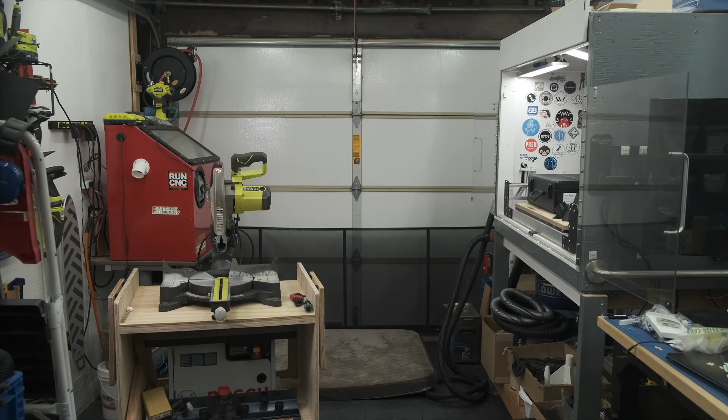I suffer from a mental affliction called being an engineer. It means I go through life looking at everyday objects, breaking them down in my head, wondering how different parts were made, and imagining how they could be improved. It could be anything from cheap plastic knickknacks to consumer electronics to storefront signage. One of the items in my shop that has been a long-standing subject of this silent, sometimes judgmental scrutiny is this, my Ryobi compound miter saw.

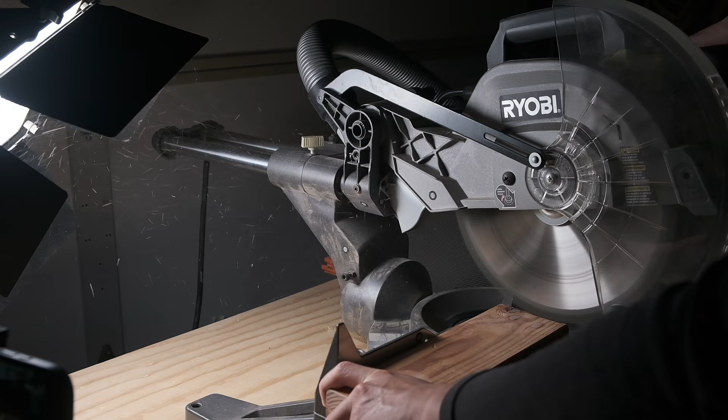I bought this thing years ago when I was building out my shop on a budget, and while it does the job I need it to, I've always hated one thing about it. This dust collection system, because to be quite honest, it does absolutely nothing. It's a flimsy funnel that's woefully inadequate for the task it's supposed to do, and it lets dust get everywhere in my shop. That's partly why I made it a priority to install an air filter in my garage.

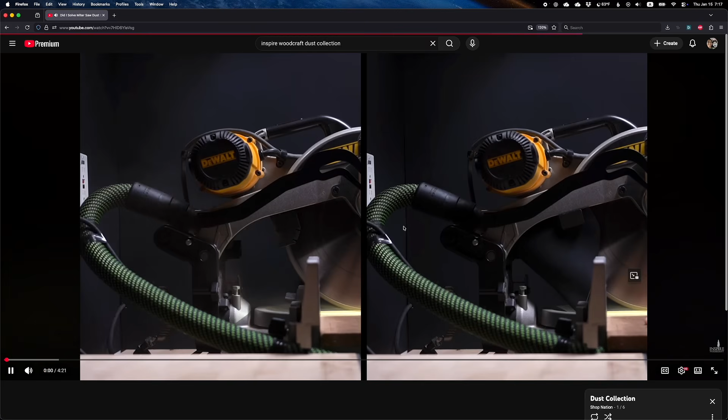But I know this deficiency can be fixed because improved dust catchers can be had for other miter saws, even if only because of third-party modifications. YouTube channels like Shop Nation and Inspire Woodcraft come to mind. And the idea that I could one day fix my own miter saw has actually been stuck in my head for years now. There's just been one major obstacle.

The design constraints for these two-part injection-molded vacuum hose adapter and catcher funnel that Ryobi made revolve around some seriously funky geometry. And while I could try and measure and model and design and iterate against a questionably accurate 3D reconstruction, I've recently gotten a hold of what I believe is a much better option.

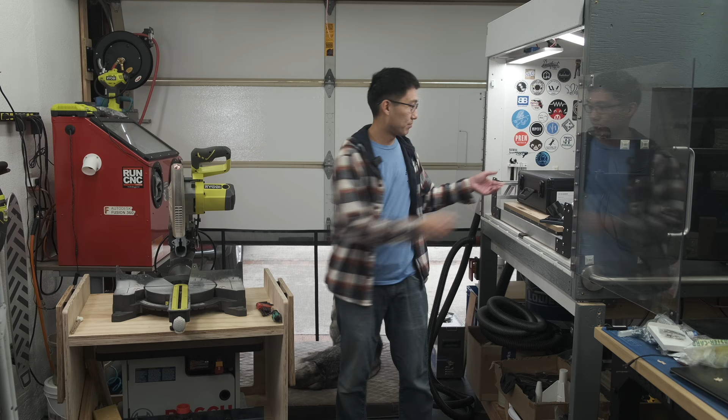This is the MetroY Pro 3D scanner, one of Revopoint's latest models, which they were kind enough to provide for me to play with. With this device, if the marketing material is to be believed, I should be able to create a digital clone of my miter saw way faster than I could by painstakingly reverse engineering the thing with calipers. And then from that 3D model, I ought to be able to design an upgraded dust collection apparatus.

Now, I've never used a 3D scanner before, so although this is something I'm genuinely excited to try out, please keep in mind that I am not an expert. I'll do my best to provide some basic information about the scanner, how it works, and my experience using it as accurately and honestly as I can.

But if after this video you think 3D scanning is something you'd be interested in learning more about, I would highly suggest seeking out a couple other videos about this subject from more experienced people. There's some really solid content out there, both about 3D scanning in general and using specific scanners like the MetroY Pro. I found those quite useful in my own education. With that disclaimer out of the way, let's talk game plan.

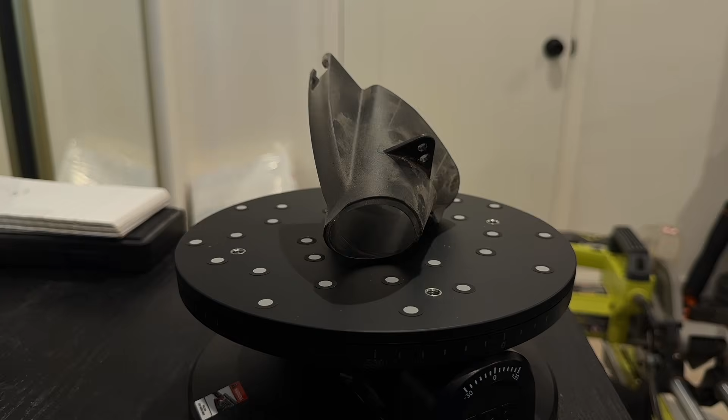First, I'll need to scan my miter saw, and probably the dust collection parts too, but separately. Then I'll need to process the point cloud data from my scans into a mesh model that I can import into Fusion 360. In Fusion, I can align that mesh to my coordinate system and start 3D modeling against it. And then with some iteration and 3D printing, I should end up with an improved dust funnel for my miter saw.

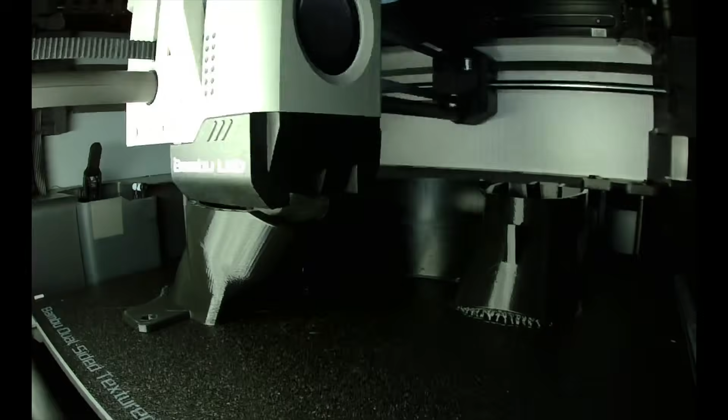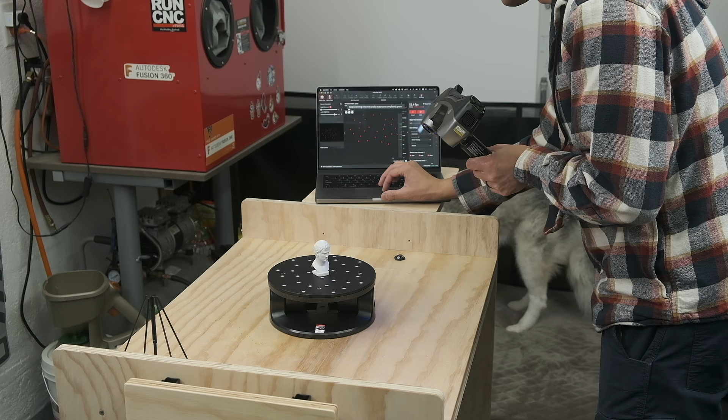Conceptually, that all seems very easy, but as a 3D scanning noob starting from zero, there's a few more steps that are implied and probably shouldn't be discounted. First, I need to understand what exactly this device is that I agreed to try out, and also figure out how to use it and the included scanning software that I've never touched before. And for that, I should probably do some test scans on simpler geometry to get the hang of things. Gotta learn to walk before I run, right? So let's dive in, starting with the hardware.

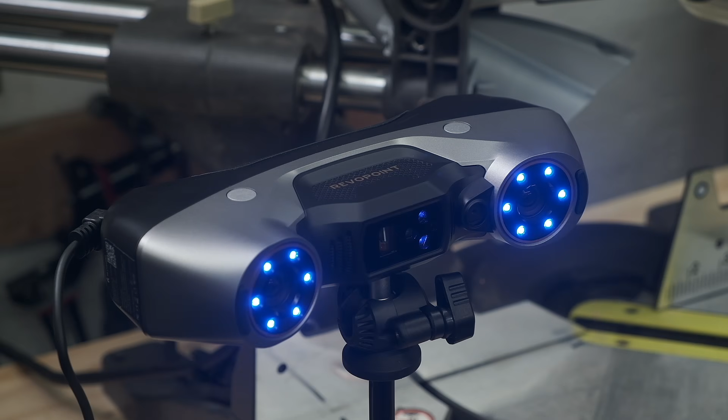This is the MetroY Pro, the latest addition to Revopoint's Metro family of scanners. The Metro series kind of straddles the line between prosumer and professional use cases, and is good for what Revopoint describes as small to medium-sized projects, basically anything up to about 1 meter cubed. The primary method of scanning revolves around using a blue laser source to project patterns on a subject, and using 2 offset image sensors to triangulate where those patterns fall on a surface.

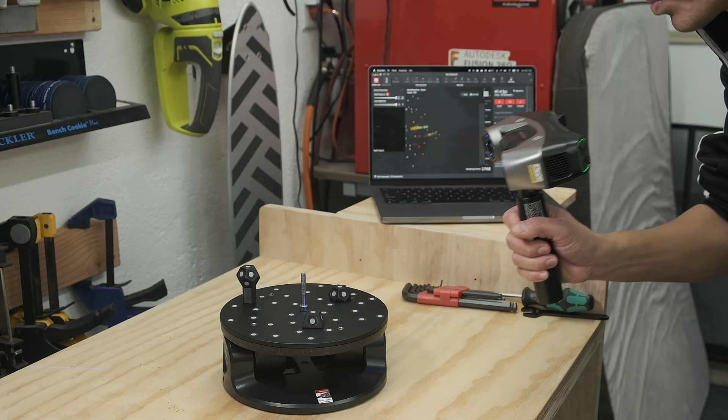The capture resolution is supposedly good enough to register some pretty tiny details, think thread profiles, mold parting lines, or the complicated fillets that injection molding designers love to hide in dark corners of a part. And one of the big headline features of the MetroY line that Revopoint says sets this apart from its predecessor, the Metro X, is wireless scanning.

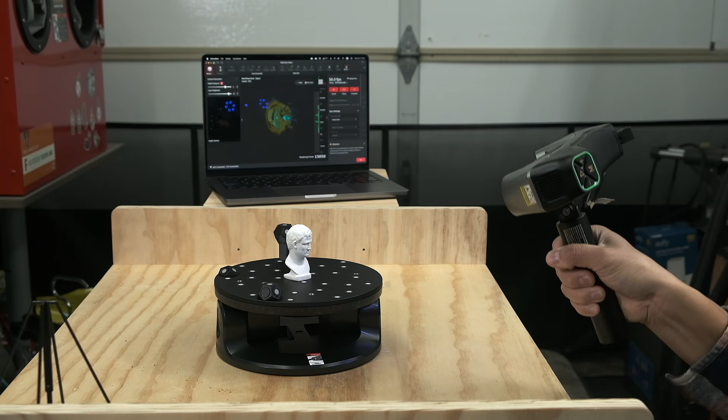You plug this thing into a power bank, connect your computer to the scanner's Wi-Fi network, and start scanning, which can be handy since you'll often need to point the scanner at your subject from multiple, occasionally awkward angles. Being untethered can be a nice plus.

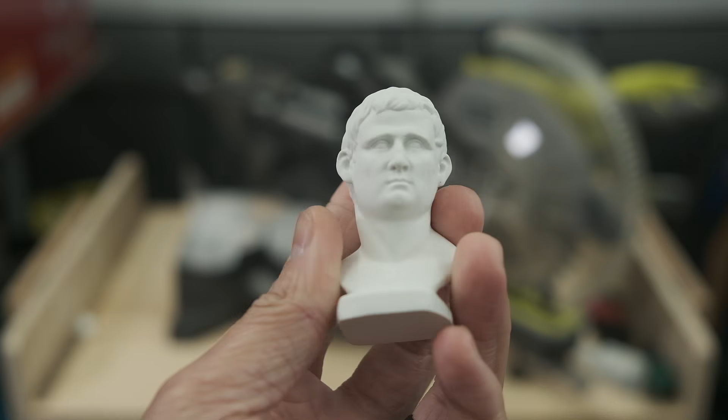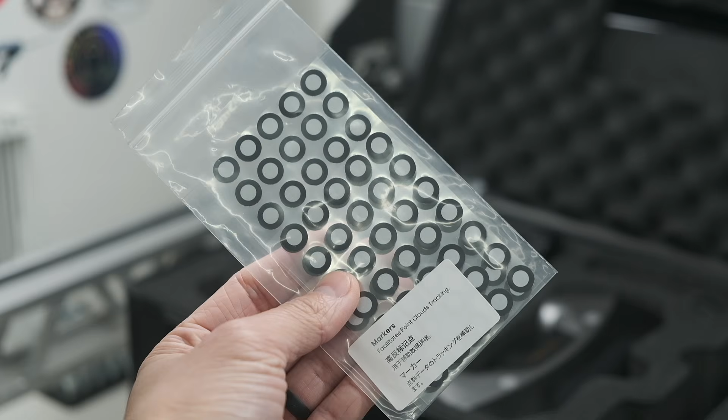The astute among you might realize that the thing I'm building up to scan is the exact opposite, covered in shiny metal and dark painted surfaces, but don't worry about that right now, that's a problem for later. The Metro line of scanners requires the use of retroreflective dots to serve as reference points. If you're familiar with virtual reality or AR headsets, this is very much like inside-out tracking.

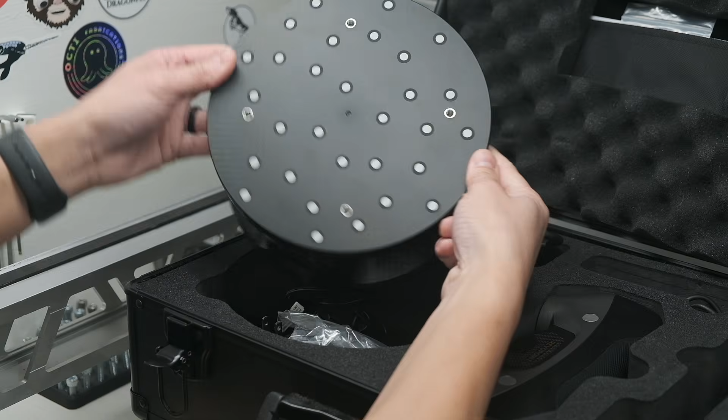A camera in the device looking out finds features in its environment and uses those features to geolocate itself. For inside-out tracking though, I need 4 markers to be visible at any given time. And with an object as small as this mini bust, I can use the included turntable accessory to provide the tracking markers needed as long as the angle I'm scanning at isn't too shallow.

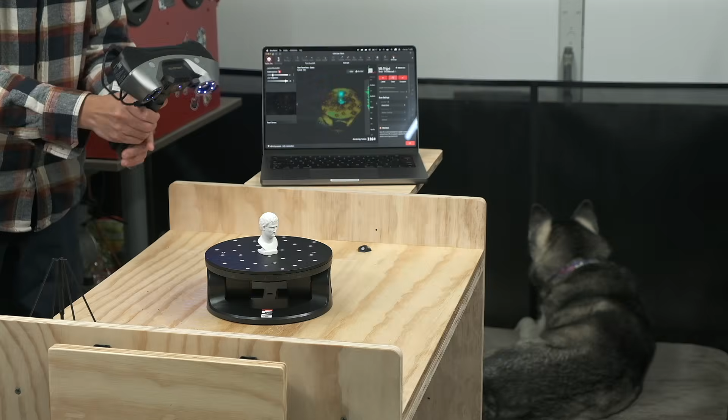Now, I didn't really prepare much for this experience other than watching a couple of YouTube videos. I just wanted to start blasting with lasers. And what I quickly learned is that while the scanning process is pretty simple, the more meticulous you are, the better your results. You need to sweep the light pattern the scanner emits over the surface multiple times from different directions while varying the angle constantly.

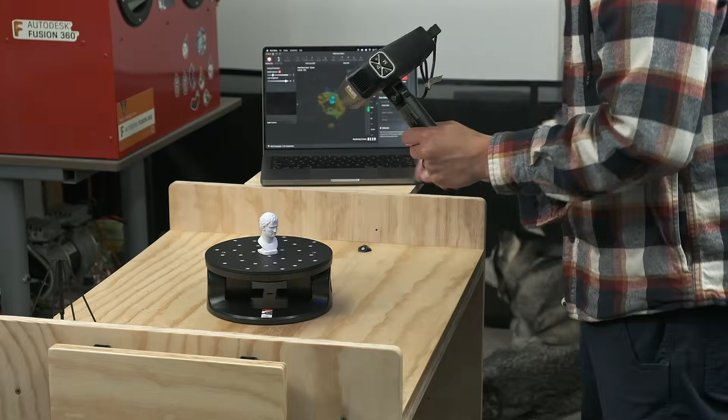While you're doing this, the MetroY Pro is continuously snapping stereo images of the subject and sending it to a computer for processing. That doesn't happen on device. The better your computer hardware, the more images per second you can process.

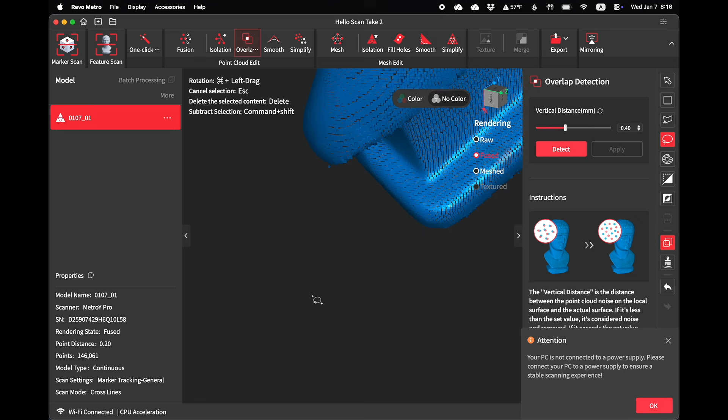After a couple minutes of scanning, I was able to try out the post-processing pipeline in Revo Metro, cleaning up the point cloud and then meshing the data. The software has a pretty linear flow, and I got all the details I cared about from a single scan. No need to fuse multiple scans to create a complete model. So that means I'm ready to scan the miter saw, right?

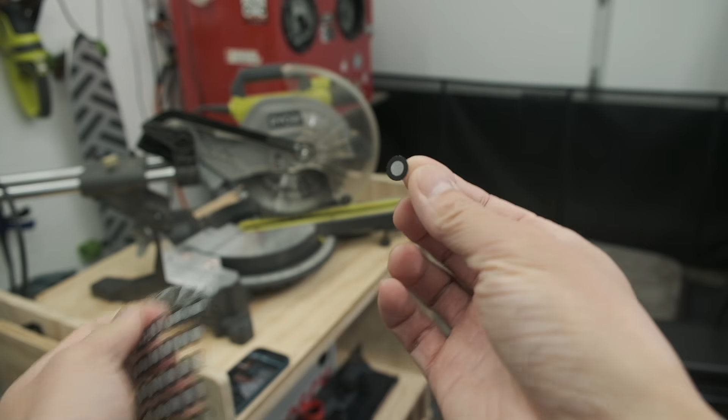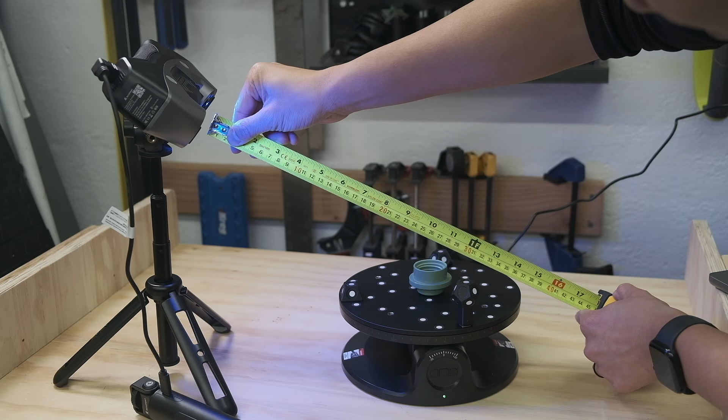Almost. Scanning something bigger is going to require me to place tracking dots all over the place, because if you remember from earlier, you need at least 4 in view at any given time. When you factor in the MetroY Pro's field of view of just under 50 by 40 degrees, which looks like this, and consider that the optimal scanning range is between 200 to 400 millimeters, or roughly 8 to 16 inches, it works out that you basically need a tracking marker every 4 to 6 inches, and that assumes every tracking marker has a clear line of sight to the scanner at all times.

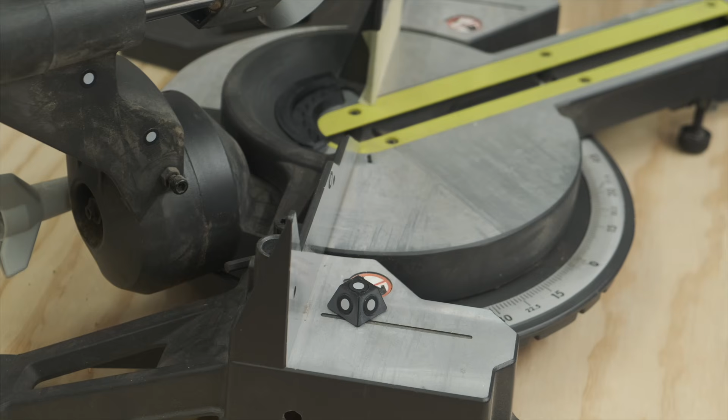If the geometry you're scanning has a lot of protrusions or irregularities, or you need to scan from many different angles, you're going to need even more to provide consistent coverage. That means potentially dozens of dots per project depending on the geometry's size and complexity.

Now, Revopoint included more than enough markers to get me through this project, but I don't like the idea of these being single use. One workaround is to use blocks with markers on them as temporary datums, and Revopoint does have marker blocks you can buy for this purpose, but I was in a bit of a time crunch and I didn't want to wait for a set.

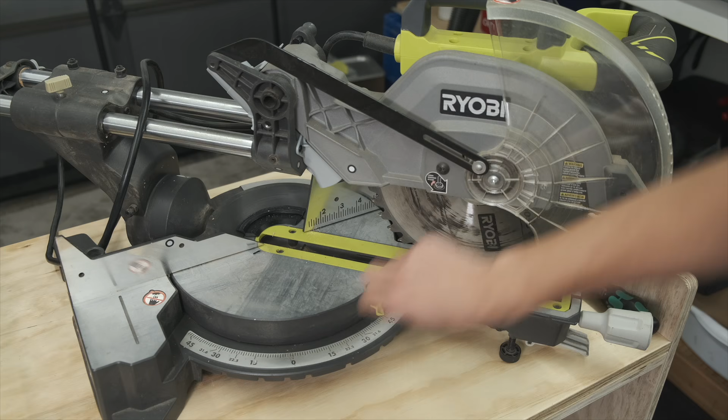Thanks to the power of the internet, specifically the 3D printing community, I was able to make my own reusable magnetic markers in a matter of hours. The key when using these things is that they need to be really stable, otherwise you'll throw off the whole scan. That was a lesson I learned the hard way. I placed these marker blocks all over my miter saw, including sticking some to the saw blade.

Now, tracking markers are only half the story. We need to talk about the imaging process too. Shiny objects scatter light, dark objects absorb light. Neither of these things are friendly to optical scanning tools that project a pattern of light onto a surface and interpret the reflected return. My miter saw is not a subject that lends itself well to 3D scanning, at least not without modification.

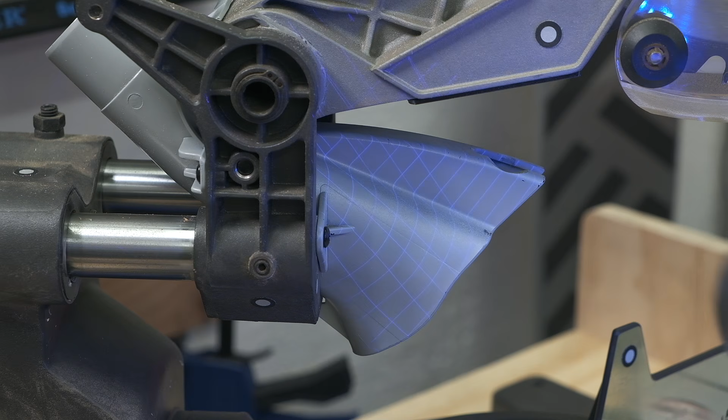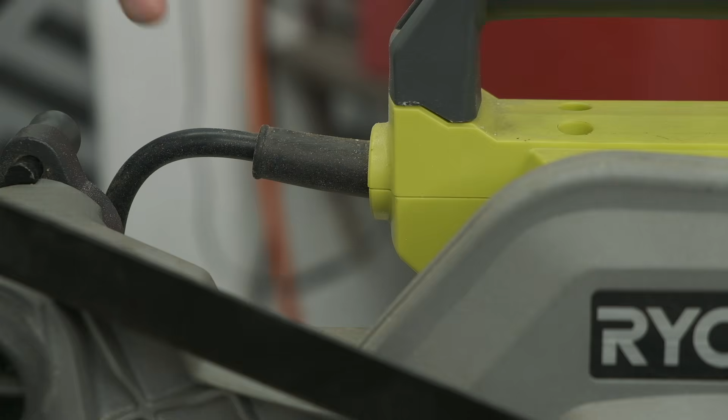There are products out there you can spray on an object to make surfaces easier for a scanner to read. These will either sublimate in a few hours or require mechanical cleaning to remove. You can also use a DIY mixture of something like alcohol and cornstarch or talc powder in a spray bottle, though they don't always adhere very well to all surfaces. Instead of using one of those options though, I decided to see if I could get by with an all-natural coating of grime and sawdust.

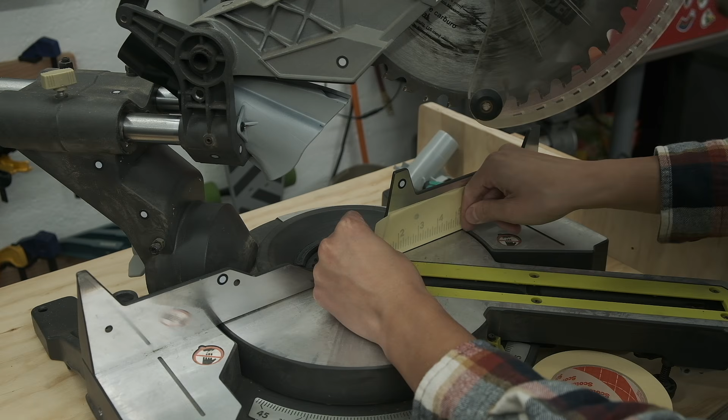There were a few places though where I wanted to make extra sure that the scanner got a solid laser return, so I used some low-tech surface modifiers like tape and paper. My saw's fence was one such area, since that's a set of surfaces I know I'm going to want to reference in Fusion 360. And for the table, since it's flat, I thought I could just place a sheet of paper on the saw as a reference.

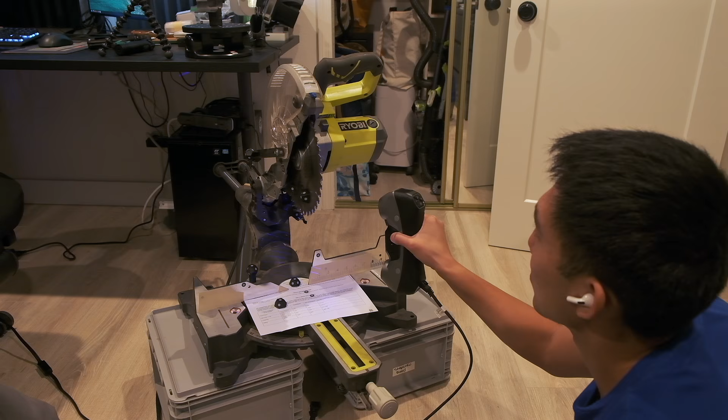That ended up working okay, but there was one time I accidentally bumped the paper when I was trying to scan around the saw blade, which ended up moving several tracker markers. The main castings on these Ryobi saws are aluminum, so the magnets in my marker blocks were useless. Because of that bump, I had to terminate the scan early. You can see that once I realized what had happened, I made sure to keep the scanner pointed up to avoid contaminating the point cloud data until I paused and stopped the session.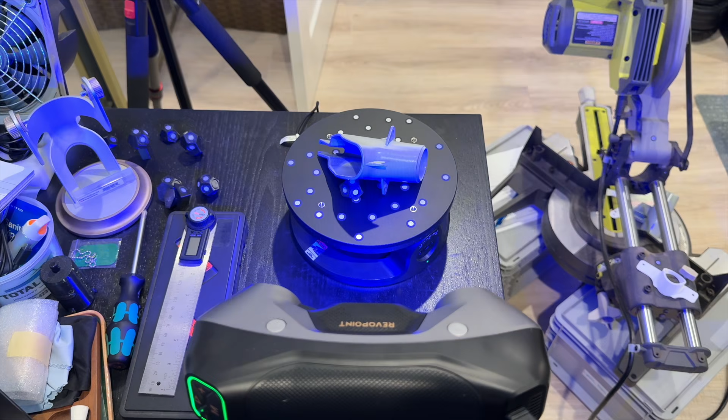And as an extra point of reference for my design, I also scanned the original injection molded dust collection parts that came with my saw. These pieces are made of black plastic, so scanning them posed some challenges, but since I had no intention of using them again, I figured there would be no harm in spray painting them to a lighter color. These parts, when set on the turntable, ended up scanning into my computer brilliantly without any trouble at all.

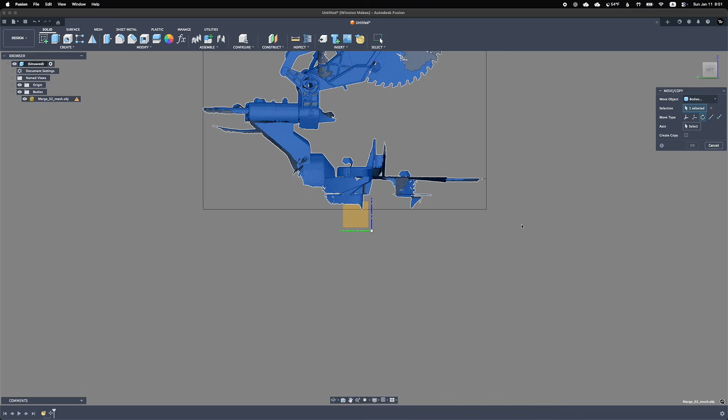I brought my completed mesh model into Fusion and aligned it to the global coordinate system as best as I could. I basically just used the edges of my monitor as a reference and lined up the perpendicular edges of the saw against it. After getting my model situated, the first thing I did was draw up a simple test plate to see if it would interface with the real saw.

One of the nice things about trying to reverse engineer a metric product is that even though the mesh model is imperfect, you can usually assume that an engineer designed it using nice round numbers, or at least to a clean decimal point. That assumption doesn't hold up as well when things are designed in inches.

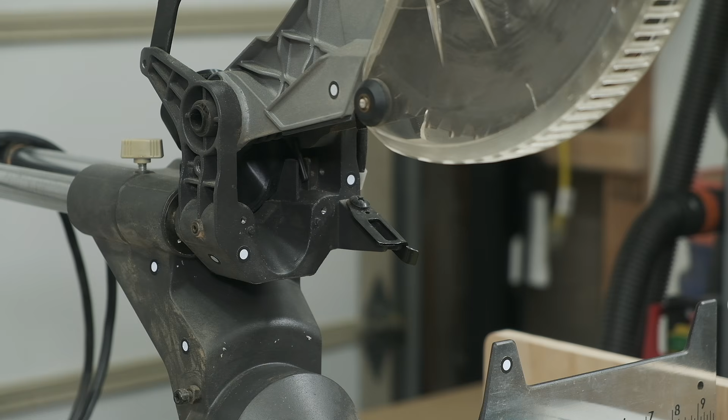So although my handheld scan of certain dark areas wasn't able to resolve features like M4 threaded holes, that would obviously be asking too much, I can easily make out where the mounting holes and locating bosses for the dust chute are and guesstimate their coordinates with near perfect accuracy. And as evidence of that, my little test piece fit perfectly.

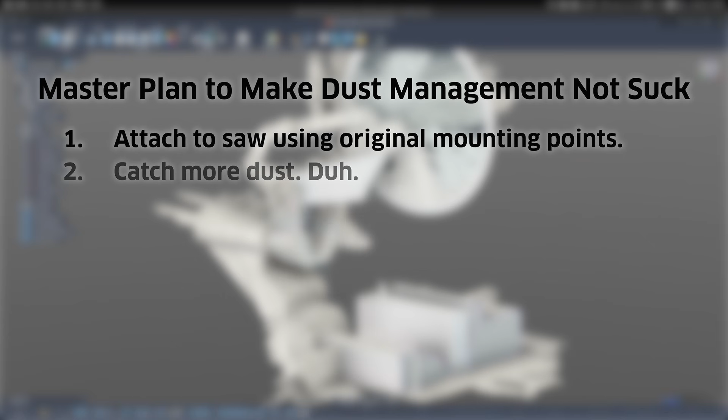With the scan and accuracy of my model verified, I started working on an improved dust funnel. These are the requirements and constraints I had in mind when doing this. 1. The new design must fit the miter saw the same way as the original. 2. It must catch more dust than the original. If it doesn't do this, that's an obvious and instant fail. 3. It needs to promote better airflow and hook up to a vacuum hose with less flow restriction.

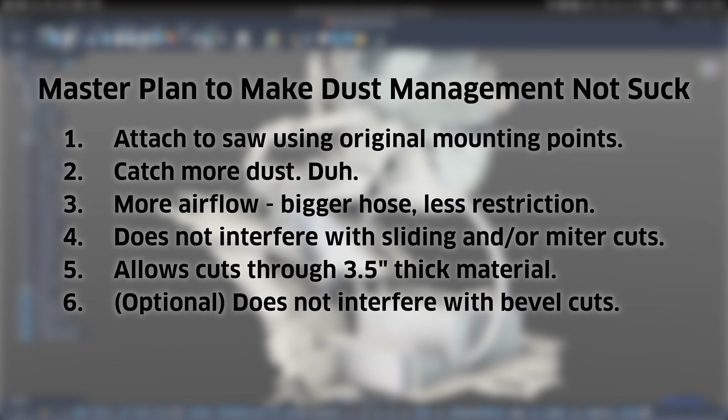4. It can't interfere with sliding crosscuts or miter cuts. 5. It shouldn't prevent cuts through materials up to 3.5 inches thick. That dimension was chosen because 2x4s are the most common thing I'm cutting on this saw. 6. Optionally, we should also be able to perform bevel cuts with minimal disruption, but admittedly this one is the hardest constraint to respect because the clearances get so tight, so we'll just do what we can.

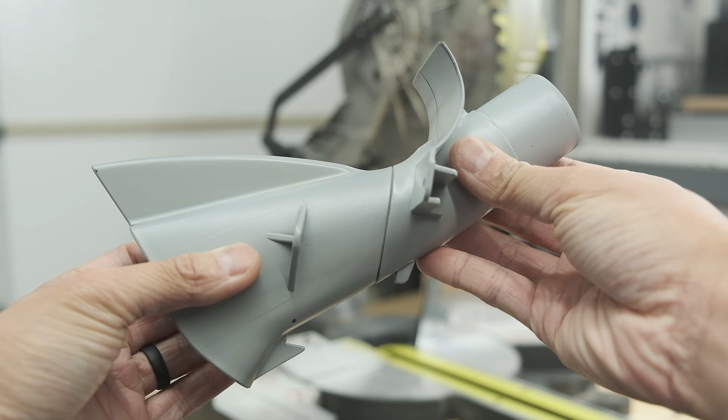My working idea was that I could remake these parts to have a larger cross-section for both better chip collection and higher airflow. Basically, reimagining these parts without the constraints of injection molding and trying to use every last cubic centimeter available within the saw's frame.

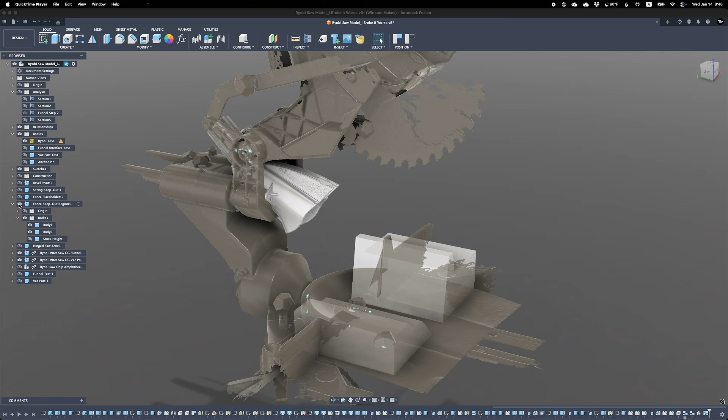Early on in the modeling process, I made some helper geometry to aid my design. Stuff like virtual pivot points for joints, and keep-out regions like for where the torsion spring for the saw arm lives, or the fence, or expected stock that I would cut. Now, you'll notice that the keep-out region for the fence here doesn't match the original scanned fence, and that's because I took the shape of the original fence and rotated it plus or minus 45 degrees, then projected that profile onto a flat plane perpendicular to the saw blade. This way, I'll know how close the fence gets to the blade and the dust collection bits during different miter cuts.

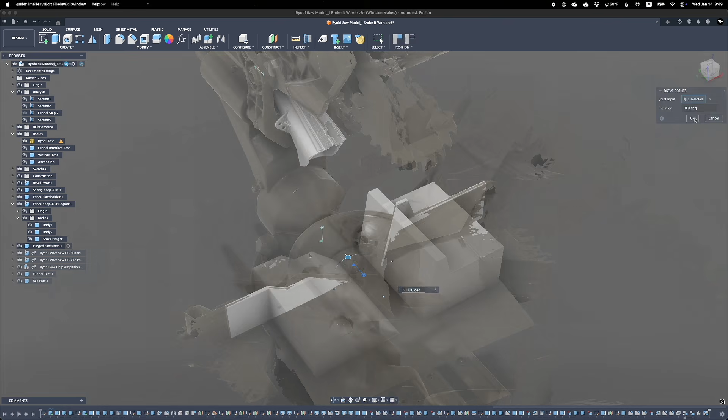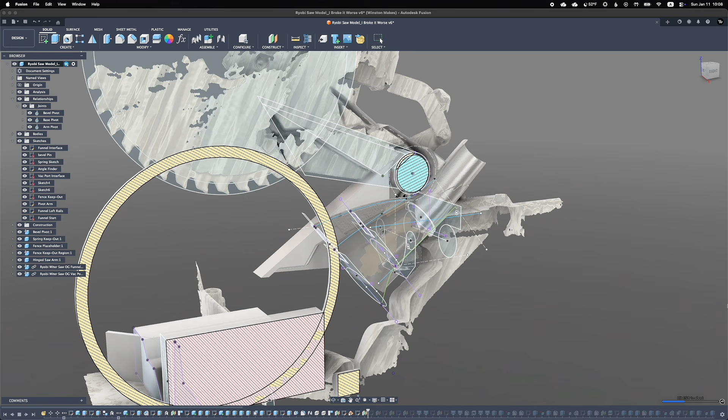Also, I made a crude model of the saw's pivoting arm since I can't actually manipulate the mesh model. This gives me a bare minimum working model of the saw that I need to evaluate the various volumetric constraints around the dust funnel. Now, I worked on this model in my spare time on and off over about a 2-week period, and the whole CAD process was way too convoluted to be able to walk you through everything cleanly, but I'll take you through a couple of my thought processes, iterations, and revelations.

My original plan for the dust funnel was to draw a bunch of cross-sections that would nestle nicely within the miter saw's mesh model and then loft between them. Now, when you have a complex profile of more than one primitive shape, like the rough profile of my dust funnel, Fusion does a pretty good job of keeping features like hard corners flowing from one sketch profile to the next. But if you're trying to evolve that lofted profile from one general shape to another, and then when you shell a model like that, surfaces get even worse. With follow-on features like fillets or chamfers, one small change can lead to your entire Fusion timeline blowing up in red.

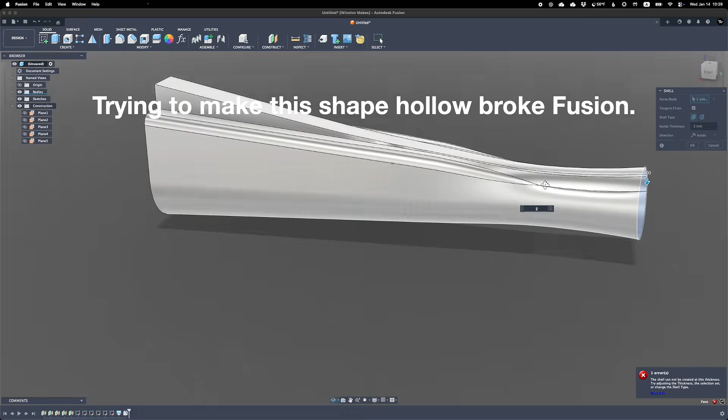Instead of trying to loft one combined mega shape through from start to finish, I learned that things are much cleaner and easier if you loft multiple shapes separately and then combine them at the end. The surfaces are much smoother, and it's easier to control the transition of the loft with rails, and you can make changes to certain parts without breaking everything downstream on a model. This is probably not a revelation for some of you, but I rarely design anything that's not an extruded or revolved feature.

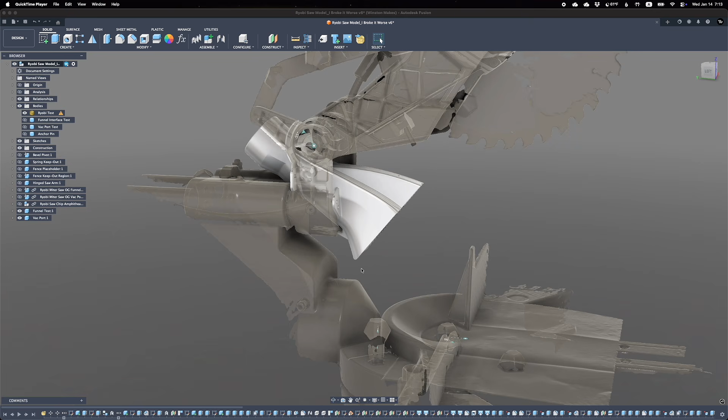This is the final shape of the funnel I ended up with. Compared to the original, it's got a decent amount more capture area down low, closer to where the saw blade is going to be flinging chips outward.

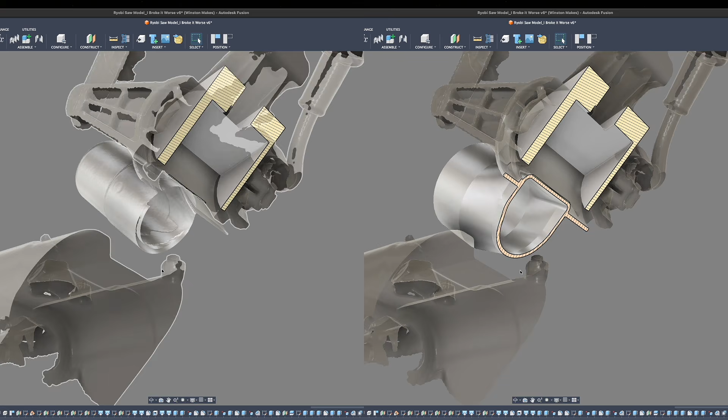For miter cuts, I'm theoretically still within the space allotted to prevent interference, and for normal bevel cuts, there also shouldn't be any issues. As the funnel transitions through the miter saw arm, I squared up the throat near the back where it passes through the saw arm's pivot point. This maximizes the cross-section for flow, utilizing almost all of the space available inside the miter saw's geometry. It then tapers out to a larger port that accepts either a 1 3/4 inch fitting internally or a 2 inch fitting externally. This is in stark contrast to the original vacuum port, which wasn't even 1.5 inches at the OD.

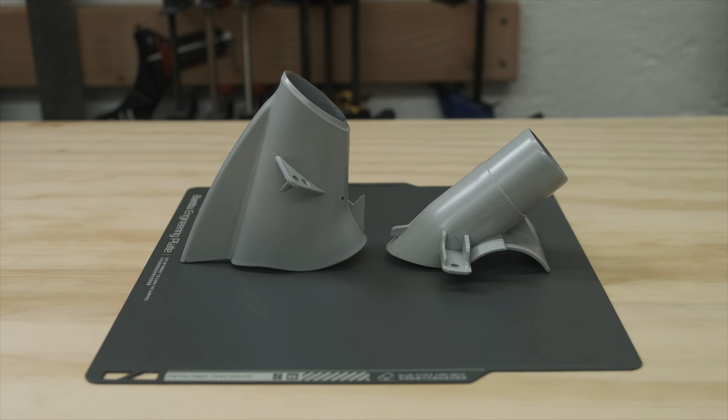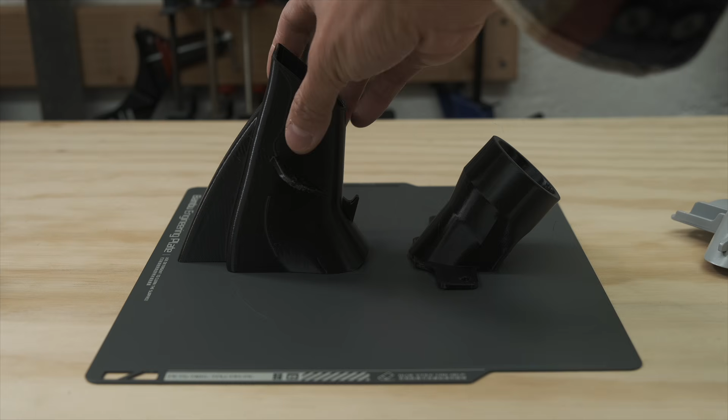To make this model work in real life, I needed to split the funnel into 2 parts, just like the original. And here I needed to consider how I would be producing these parts, which would be on a 3D printer. To make my dust collection upgrade printer friendly, I figured that the plane of the aft mounting flange made the most sense to split my funnel at. This would let me print that half on a flat surface with minimal support.

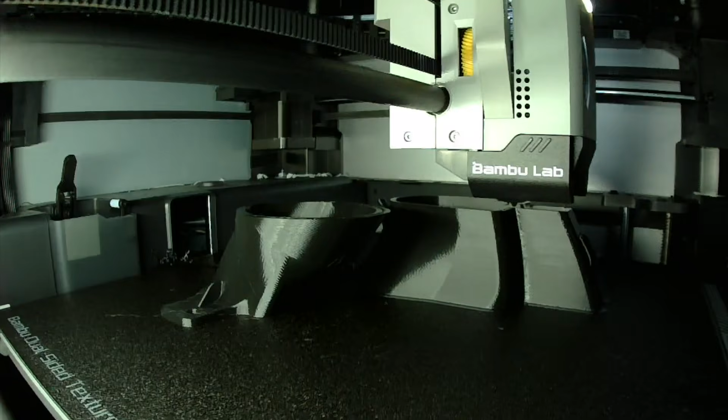And the front end of my chip funnel was designed with a flat mouth that was mostly on a single plane, requiring only a little bit of support material. And conveniently, the mounting flanges are at such an angle that they don't need support. To allow the halves of the funnel to interlock just a little bit and hopefully form a tighter seal, I modeled some tapered features along the cut plane so that the funnel side would wedge into the vacuum hose side.

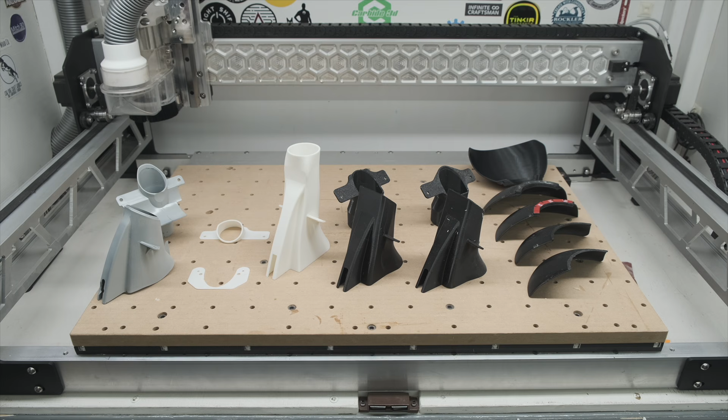The printed parts, even the earliest iterations, fit the Ryobi saw really nicely. The things I improved over time were mostly from design oversights, like making my interlocking features too delicate at first, or failing to consider how there's a part of the saw arm that tapers inward slightly, interfering with my funnel geometry. Of course, it's also something it seems Ryobi engineers overlooked as well, since their funnel appears to also interfere slightly with the saw arm.

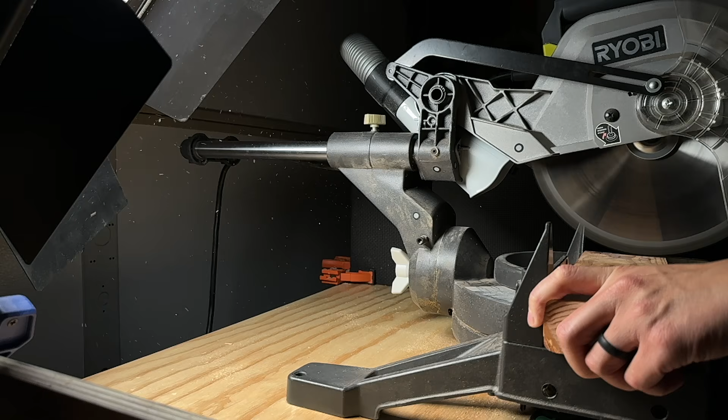While I have the OG equipment here though, I think it's time to do some actual testing and get a baseline. Here is a control test with a cut through a 2x4, and you can see the dust funnel is absolutely useless. A ton of sawdust ends up getting blasted into my garage. 240 frames per second isn't quite fast enough to capture individual flecks of dust as they get yeeted by the saw blade, but you can see a bunch of them impinging on the saw's structure when they bounce off and slow down, which illustrates that the general flow of chips thrown off by the saw blade is nowhere near where the dust funnel is.

Now, watching this footage over was actually a little discouraging, because I realized that the reason it performed so poorly wasn't for lack of airflow. It was that the chips just never ended up remotely close to where the funnel was in the first place. This didn't bode well for my own design, because other than a slightly bigger mouth and better airflow, it doesn't do anything fundamentally different, but let's try it anyway. Same setup, same cut speed to the best of my ability, and sawdust still ended up everywhere. So it's clear that something different needs to happen in this area.

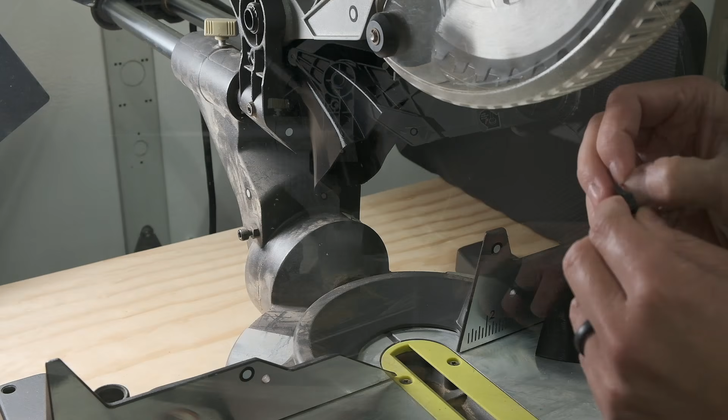My brain immediately jumped to the idea of making a sort of half-hemispherical ramp to redirect chips up and towards the airflow going into the dust funnel. And to make sure it wouldn't interfere with bevel cuts, not that I've ever made a bevel cut on this saw, this chip amphitheater, as I started calling it, should be easily removable, so I designed it as a 2-part system with magnets.

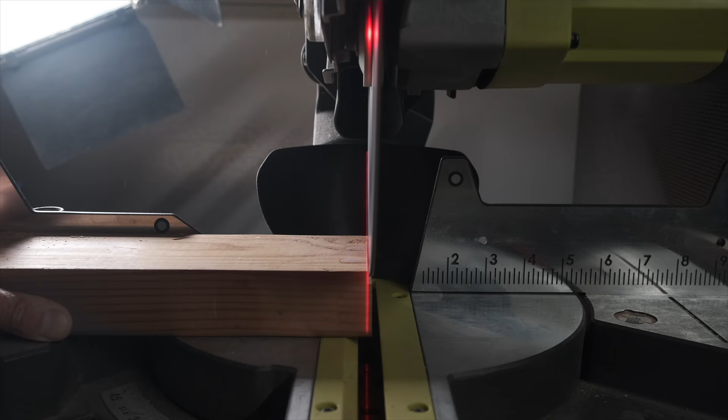In a later test, I figured out that a ramp that stopped just below my dust funnel still wasn't enough. A big proportion of the sawdust still ended up going over the chip catcher and around either side of the funnel. So I grew that amphitheater, lofting up from a semicircular revolved section to a conic curve. The thought here was that the steeper angles will do a better job of redirecting particles towards the center of the funnel rather than potentially reflecting them back out towards me, which you can see happening sometimes in the test footage.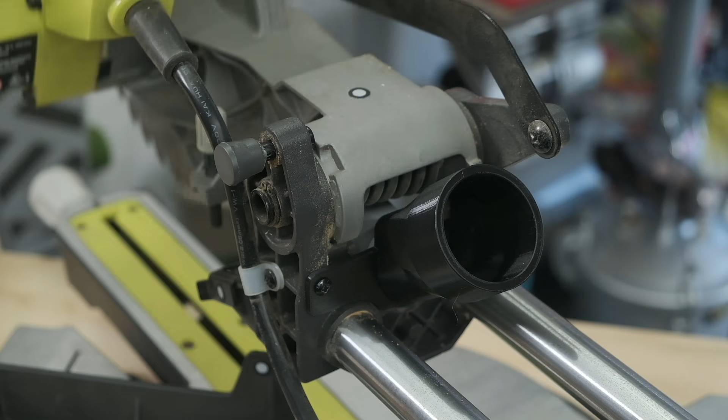And during the next cut, there were some signs of real improvement. But looking closer, I can still see that there are avenues of chip egress I hadn't considered before, like here at the back of the saw. When the arm pivots down, there's a gap that opens up. I didn't think this was going to be a big deal because, after all, there's a big honking funnel occupying most of the throat here.

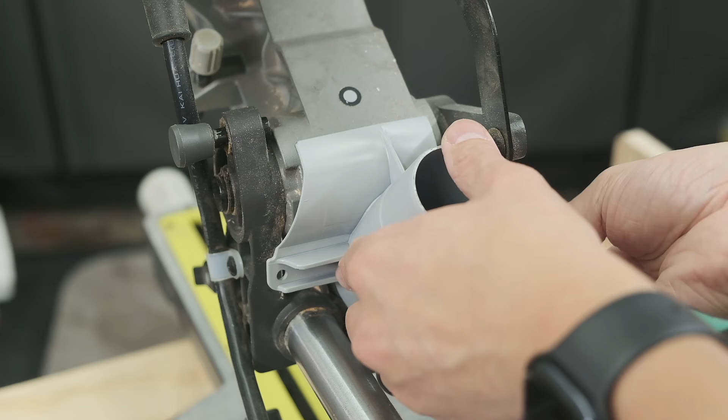That ought to capture dust going in this direction, but annoyingly it doesn't. Ryobi engineers, it seemed, had gotten something right when they attached this half-cylindrical cover to the vacuum port side of their dust collection apparatus. But that's just one of the ways that this saw lets dust escape everywhere.

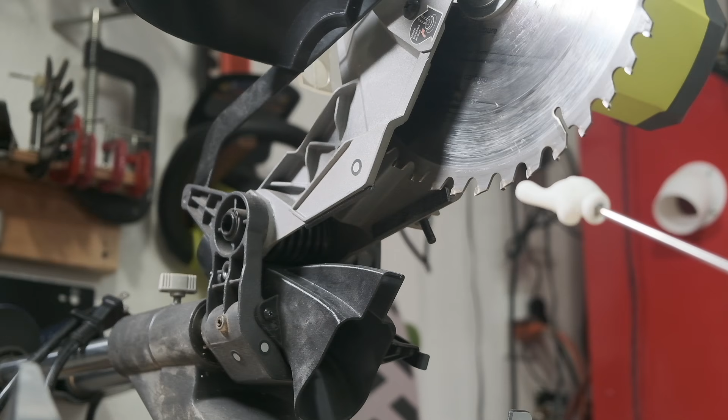The combined internal volume of the saw arm and shroud cavity creates this large turbulent chamber that pushes chips out the front or forces them out the sides around the blade in areas that are immune to the influence of the vacuum's airflow. I would actually go so far as to posit that the design of the Ryobi saw makes dust collection more difficult than it needs to be.

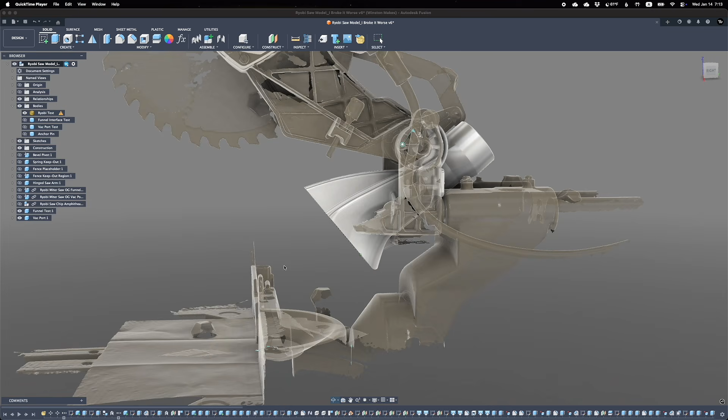Without completely re-architecting the method of dust collection that Ryobi came up with or hooking it up to some ludicrously overpowered dust collector, my minimally informed opinion is that this saw will always leak dust like a sieve. So then, given that perfection seems unattainable without an unacceptable degree of engineering scope creep, where does that leave this project? Is it a success or a failure? Well, I think my benchmark is this. Would I rather use the original Ryobi dust collection apparatus or my own custom design?

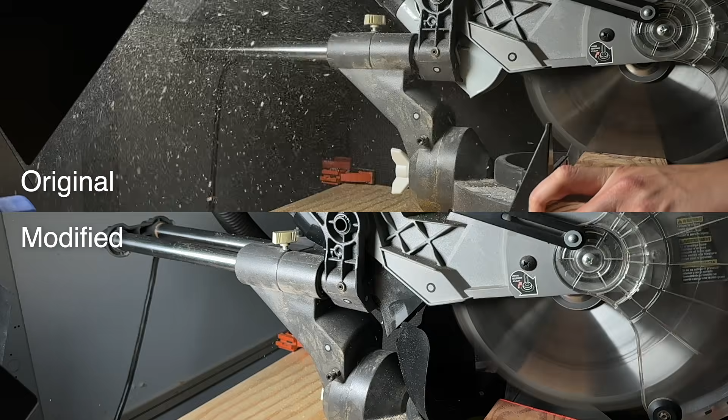If we look at the absolute worst case scenario, a sliding bevel cut where I can't use my chip ramp over here, my dust collection system is about as effective as the original, but I never use my saw like this. I'm usually doing simple 90-degree cuts through boards or 2x4s, and in that configuration, the reduction in big pieces of sawdust is maybe 50% or 2/3 over baseline if you squint. But for airborne particulates, that reduction is closer to 80 or 90%. Look at how quickly debris settles and the air clears after a cut. That is a legitimate quality of life improvement.

And since there are no real downsides or inconveniences, no regression in the saw's capabilities, I'm definitely keeping these modifications on the saw. Would I like my design to work better? Absolutely. Will this problem continue to gnaw away at my engineer brain for months to come? Almost certainly yes. But are we at the point of diminishing returns?

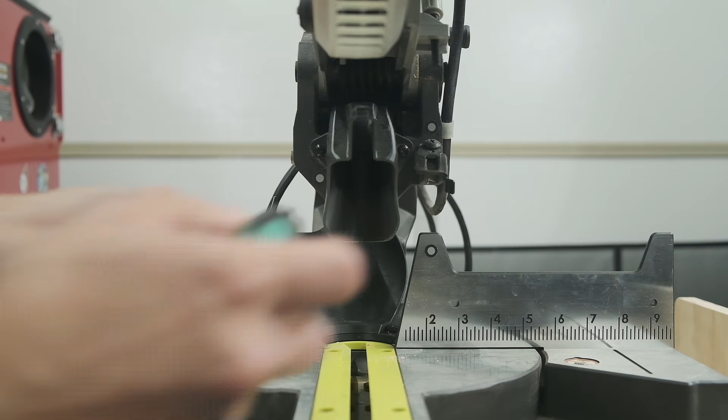I think so. I don't want to claim it's impossible to come up with a better dust collection system for the Ryobi saw than mine, but I do think that any solution that hopes to achieve substantially better performance will require a radical departure from the style of the original Ryobi equipment. This is all speculation on my part though, I'm not a power tool engineer, but I am really curious to see how others like Shop Nation are going to tackle this problem.

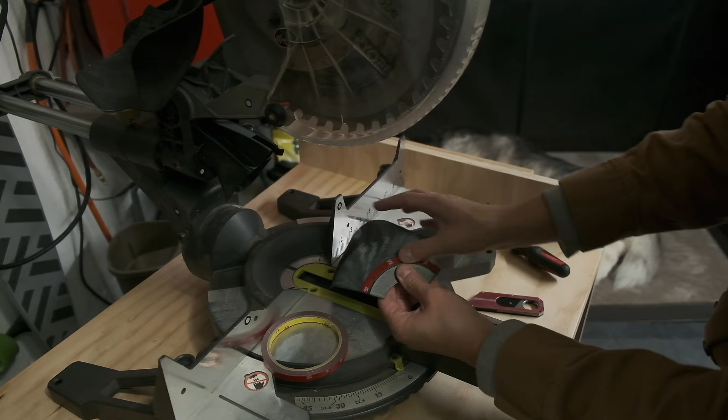The files will include the funnel, the vacuum port, and the adjustable chip catcher with a magnetic base. I designed this part to use 6mm diameter disc magnets, the exact ones I used are linked in the description, and it can be rotated in 15-degree increments for right-handed miter cuts. You just need to add a pause in your slicer before printing so you can embed the magnets.